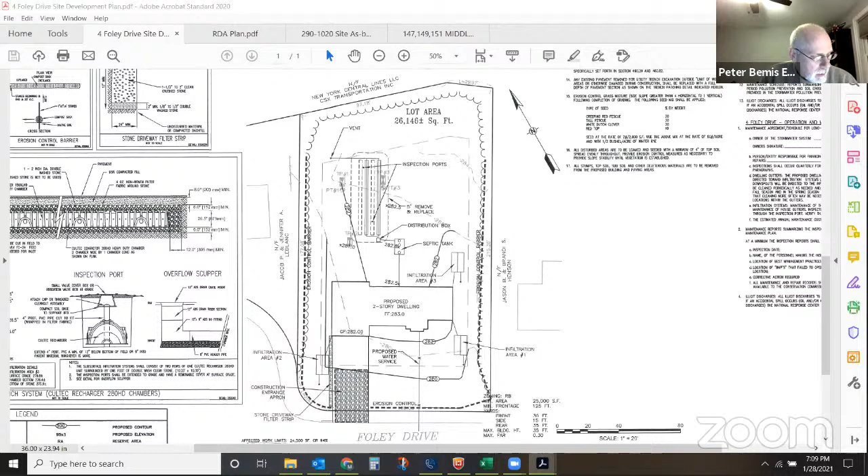Okay, thank you. Any questions from the commission members? Just a quick question - septic approval, is that done? Yes, Board of Health has approved this lot.

DEP number? There's no wetlands on this lot, so there's no notice of intent filing. We would just post an SMP sign with the street number on it, so that if someone had a complaint, they would be able to lodge it with your commission and know the address. This is an application of the town bylaw, the stormwater management bylaw, not the Wetlands Protection Act.

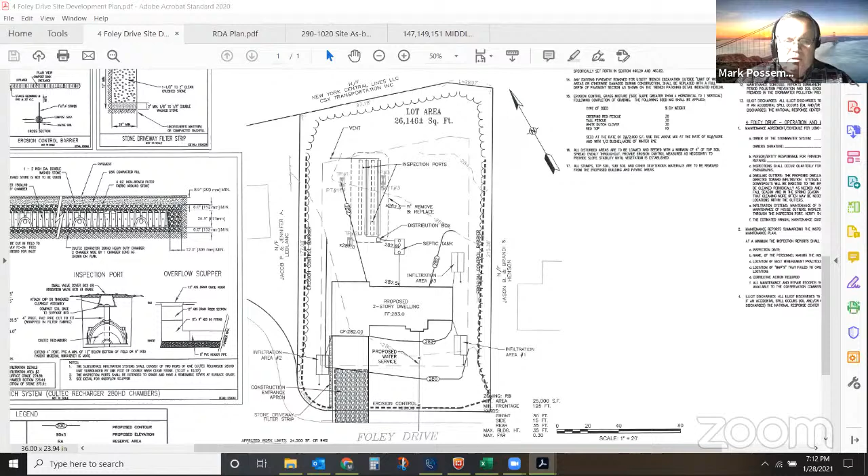Okay. So if there's nobody that has their hand raised, then I think, do I hear a motion to close this hearing?

So moved. Is there a second? Second. All in favor by roll call vote? Watson, yes. Smith, yes. Pete, aye. Geyer, yes. I'll skip Russ. Wittes, yes. Possemato, yes, only because he just joined in. Okay.

We can come back to that, I have the decision drafted. We can do that at the end, Mark, if you'd like. I was going to ask you if you had that drafted yet. You do? Okay, yep. So we can come back to that at the end when we do the other issuances.

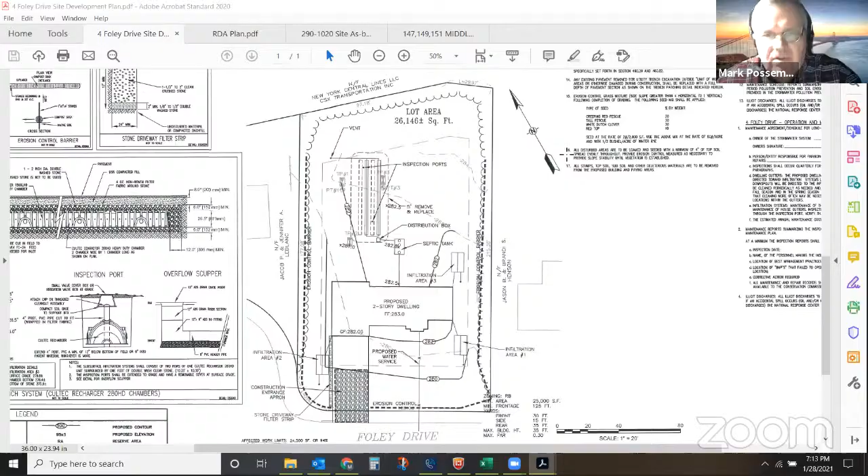Okay, 7:10, 50 Deerfoot Road, RDA, request for determination of applicability for a replacement of a failed septic. So in accordance with the Wetlands Protection Act, Mass General Laws, Chapter 131, Section 40, and the Southborough Wetlands Bylaw, the Southborough Conservation Commission will conduct a public hearing on Thursday, January 28, 2021 at 7:10 p.m.

By a virtual Zoom meeting, the commission will consider a request for determination for a project at 50 Deerfoot Road, map 43, lot 55, for the applicant James Ballard. The project description is replacement of a failed septic system within the buffer zone.

Okay, who do we have here? Joe Marquedant here, joined by Jim Ballard, the homeowner. We prepared the plan that was submitted to the commission. Jim owns number 50 Deerfoot Road, home built circa 1970, '71, septic system about the same time.

He's in the process of selling his home. The system was found to be in failure during the Title V inspection. Jim contacted us about developing a game plan to come up with a replacement septic system. The plan that you have on the screen now is our design.

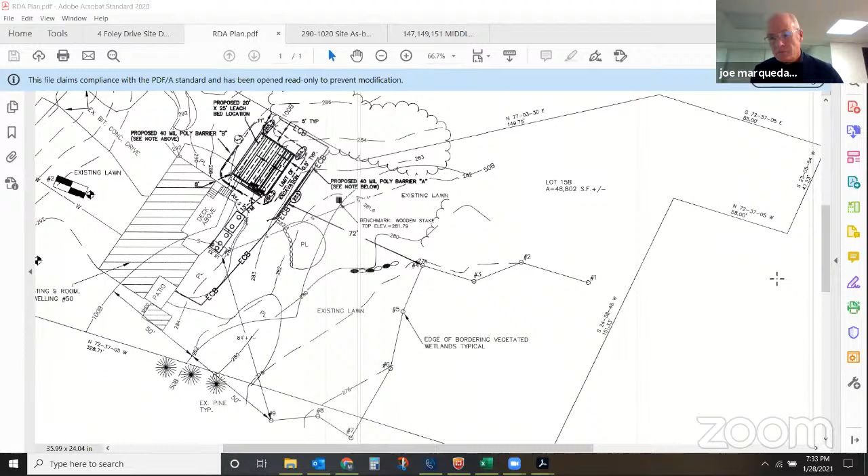Mark. Mr. Marquedant, do you think you could squeeze 5 feet out of the system, moving it towards the northwest? Yes, I believe we could. That would give me some comfort from what Matt has described as the worst case scenario with the line following the 280 contour. That would put us comfortably 50 feet away from the wetland.

I feel like we could condition this appropriately to be able to issue a negative determination, from my perspective. Agree with Ben on that, if you could push it that far. Although I would condition that we not approve the wetland line in our decision. Would we or could we ask that subsequently the wetland line be confirmed, not necessarily as part of this, but as a condition, so a future homeowner would be using the correct wetland line? We would have to come back and do that if they chose to do a project. Right, wetland line then.

Honestly, given the winter conditions we're up against now, we may have lost the opportunity to do that for a couple of months. That land's going to be concrete in the next couple days and be really hard, even if Scott and I went out there, to really look at that soil properly without a machine. Typically at this time of year with snow cover and frozen ground, we become handcuffed to be able to accurately do that. And it's not fair to the homeowner or future homeowners to not accurately depict it if that's what we're going to go after.

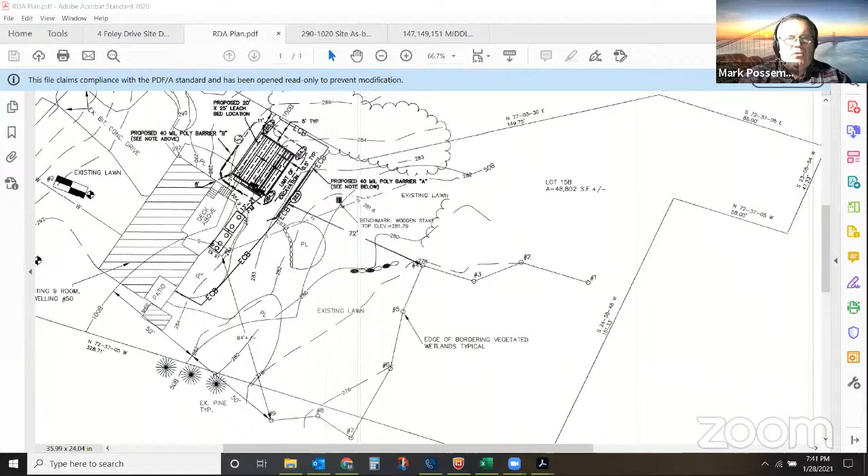All right, do you hear a motion for a negative determination that includes those conditions? Mark, can you just ask for public comment real quick before we do a motion?

If anyone has public comment, put their hand up. I don't see anything right now. I can only see people in this room, so I have no idea. Can you click on attendees, does it switch to the next list? No, I only see us. It should say panelists at the top, say 12, and attendees to the right. I see 23 participants, I click on it and get 12. I only get us, that's interesting.

So I tend to forget there's more than us, because if we're in the town hall, quite often there's just us. Who else is there? There's 11 more. All right, there's no hands up. Okay, no hands.

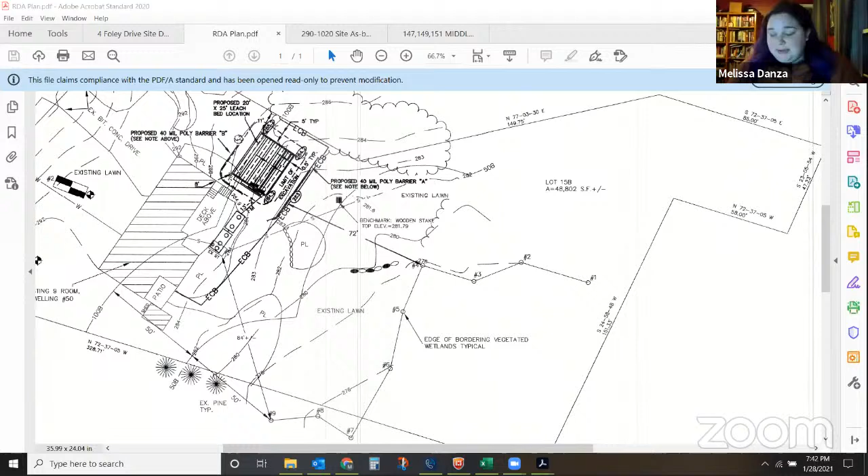So I re-put the motion that I had back on the floor. So moved. Second. Okay, all in favor? Watson, yes. Smith, yes. Pete, yes. Guyer, yes. Gregory, yes. Wittes, yes. Possemato, yes.

So Jim, I will get this to you tomorrow morning because we can do electronic signatures. I'll send it to you and your attorney as well. That's wonderful. Thank you, Melissa, and thank you all very much.

And thanks to Joe, good luck with your move. Are you staying in town or heading out of town?

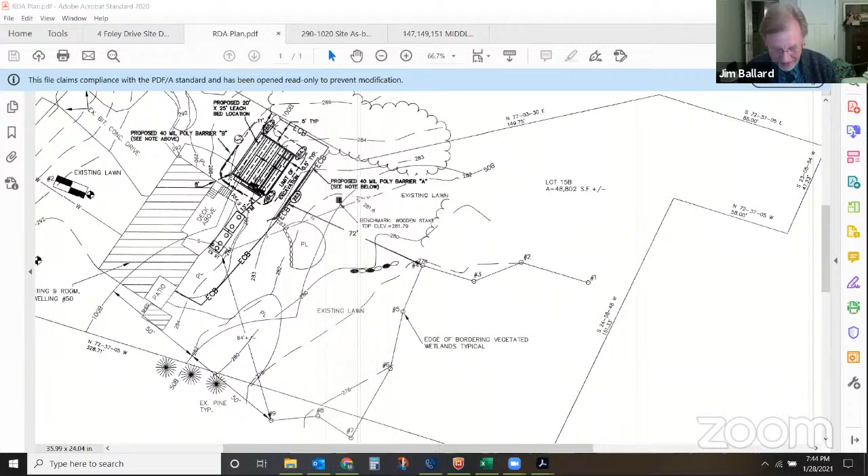My new wife, I got married on December 18th. She lives in Rhode Island, South County as it's called. Her brother and sister live here too, and it's an area very dear to her. I've loved living in Massachusetts since I came out east to go to college from the Midwest, but I love my new wife, and I'm moving to Rhode Island to a nice place in East Greenwich. We'll be coming back. I want to see what happens with the house at the end of Deerfoot that's being restored. I'm hoping it turns into something featuring a nice restaurant we can come enjoy, and drive by my old home and have happy memories.

Well, good luck to you. Thank you, congratulations, good luck. Okay, very grateful, thank you all.

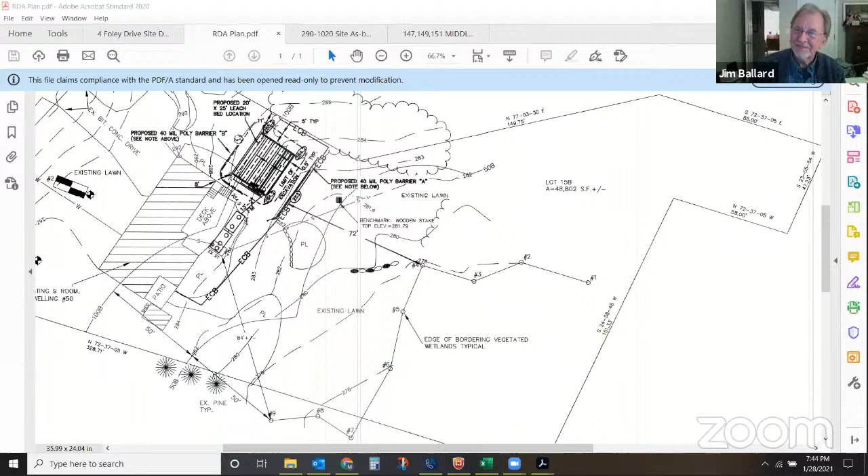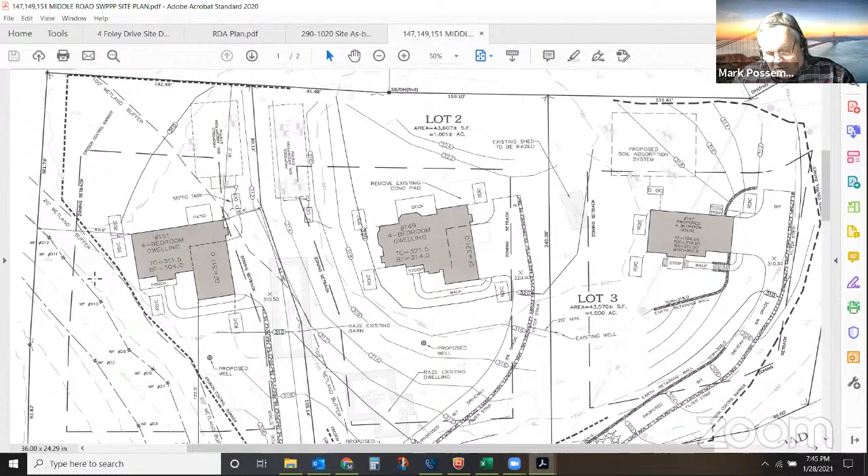Okay, next up, this is stormwater management permit 147, 149, 151 Middle Road, map 28, lots 35, 7, and 10. In accordance with the provisions of the Southborough Stormwater Erosion Control Bylaws, Southborough Zoning Code, Chapter 174, Section 13.5, the Southborough Conservation Commission will hold 3 continued public hearings on Thursday, January 28th, 2021 at 7:20pm via virtual Zoom meeting on the petition of Quality Framing Contractor, Inc. for approval of a stormwater management permit for construction of single-family homes at 147, 149, and 151 Middle Road, map 28, lot 35, 7, and 10. These hearings are being held concurrently.

Good evening, Peter Bemis, Engineering Design Consultants, here on behalf of Quality Framing Contractor, Inc. This project has been before the commission since its initial discussion in December after our filing in November. We have 3 lots, formed from 2 older farmhouses on Middle Road and adjacent land. This land was combined, 4 acres, creating 4 lots, keeping the existing homestead at 145 Middle Road, and creating the 3 lots described: 147, 149, and 151.

151 had been the subject of a notice of intent, I believe back in September, October. We had an order of conditions received and recorded, and anticipated the lots would be developed not exceeding the 50% threshold in the bylaw. Subsequent to that, work started. We found they had cut more trees and started stumping past the 50% threshold, and therefore application was made in November for the stormwater permit, and we've now heard this on one occasion.

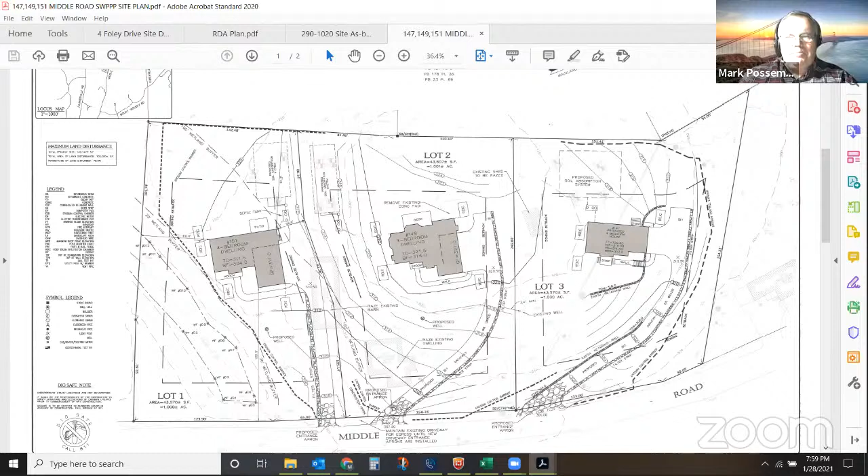Okay, if there's no other comments from the commission, I'll open it up to the public. Right, there are two hands. The first one I will allow to talk is Najee, I apologize if I said that wrong.

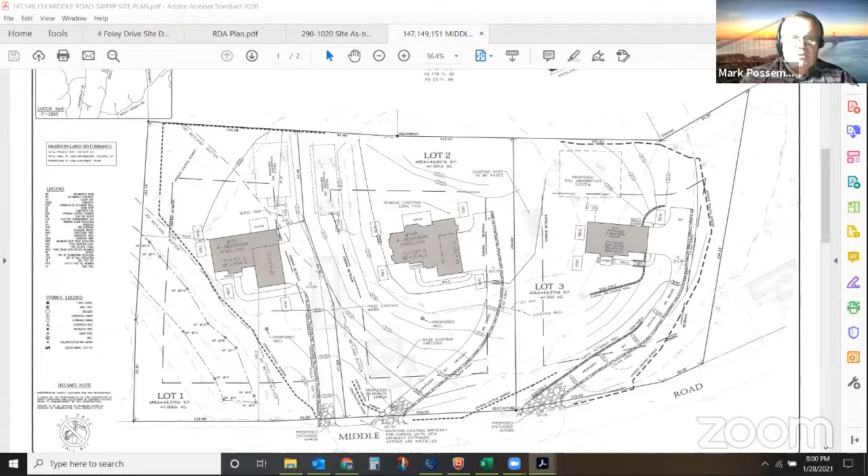You should be able to unmute yourself, and please announce who you are and where you live. Thank you, this is Nagi Elabasi. Can hardly hear you, I'll raise my voice. Hi, this is Nagi Elabasi, can you hear me better now? No. Okay, how about now? Slightly, so I'll give it a shot.

I'm at the house across from lot 1. Jason, who is at lot 1, is also on the call, and he has his hand raised. So since you called on me first, I'll start, but Jason will add as well.

Zach, thank you first of all for trying to fix this, we appreciate that, to keep our neighborhood nice and the way it is now. I'm at 6 Leeds Way, by the way. So what happened is, I think Zach tried to reach out to us a few days after the last meeting. We couldn't meet, and then he came only again last week. He had a plan, he met with Jason and talked to me as well, and we haven't heard from him since. That was maybe a week ago, I'm not sure on the date.

And the idea was that the south side did not have trees, it was only with lots 2 and 3, not with the south side on Jason's end. But Zach mentioned that he's not against it, but it's not his decision. There was no committal from him. He said he's going to get back to us because he checks with the builder or whoever is going to own lot 1 at your end. And that was the last we heard of it, and that's why we're here. We wanted to make sure our voices be heard.

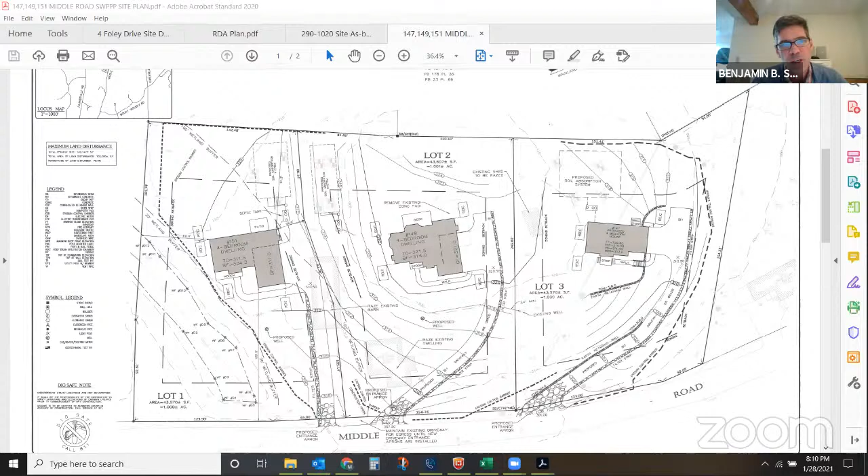Yes, could I ask a quick question? I'm just curious, Peter, in the event that Mr. Lin chooses not to participate, what would we be looking at for plantings along the west edge of lot 1? There would be some evergreen plantings put there, but if we're not doing it along the lot line, we won't get the buffer effect of a double row of plantings, so you basically always have a plant repeating.

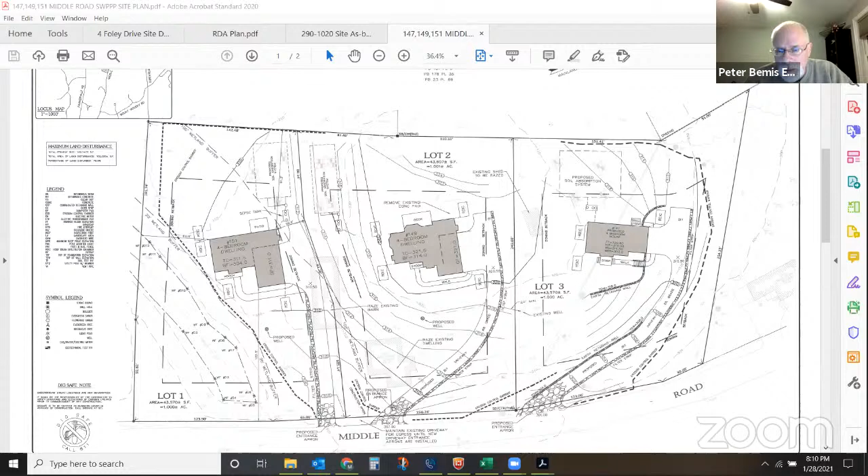No, I understand the double row you're speaking of. I just wanted to ask, in the event that Mr. Lin doesn't choose to participate, you had mentioned some other plantings that would take place. I'd like to have a firm handle on that. You said you have a willingness to memorialize it, which would be fantastic, but we can't memorialize something we don't know what it's going to be.

Okay, Zach, yeah, and Melissa, thank you for putting the exhibit up. So that's the exhibit. Peter, you were talking about continuing down this side of the property line a bit for the screening. We can introduce a few more coming back that way, and Mr. Lin wouldn't be responsible for those because they're not on his lot.

I'm fine with that. So the effect is for every one placed on the middle road lots, a staggered zigzag happens on the abutters' lots, correct. That's what we think would be the most effective way to do this. My only question is, if Mr. Lin chooses not to participate, are those spruces still going to end up on lots within your ability to commit to?

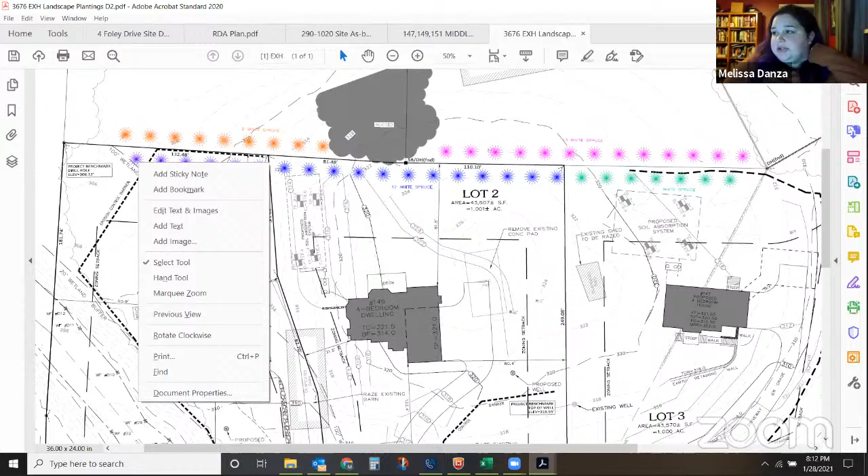I see something in the chat, and it's from Jason—did Lin raise his hand again if you want me to allow him to talk? Yeah, rather than reading his chat, he can probably reiterate what he put in the chat. Jason, you're all set. Yeah, this is Jason again, seven Leeds Way.

So what I was asked to participate in, the plantings were not on my property. I don't know why I would participate in planting trees not on my property when someone could move in and cut them down. I just want to make that clear—I didn't say I wouldn't participate. I'm happy to plant trees on my side of the lot, but if you look at the tree line and where it makes sense for this double row to continue, it's not on my property. If they're saying they'll plant a single row on their side, I'm okay with that. But the reason I wasn't going to participate was because I'm not going to plant trees on the 151 lot property on Middle Road.

Okay, I'm fine with that. Like I said, if it doesn't work, it doesn't work—the illustration is shown with the intent, that's all. So every tree you see on the east side of that line will be planted. And again, we already have an agreement with the abutters.

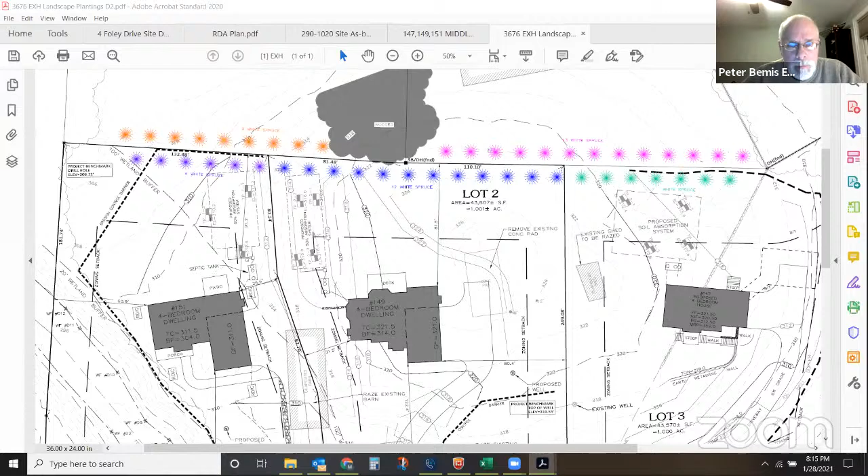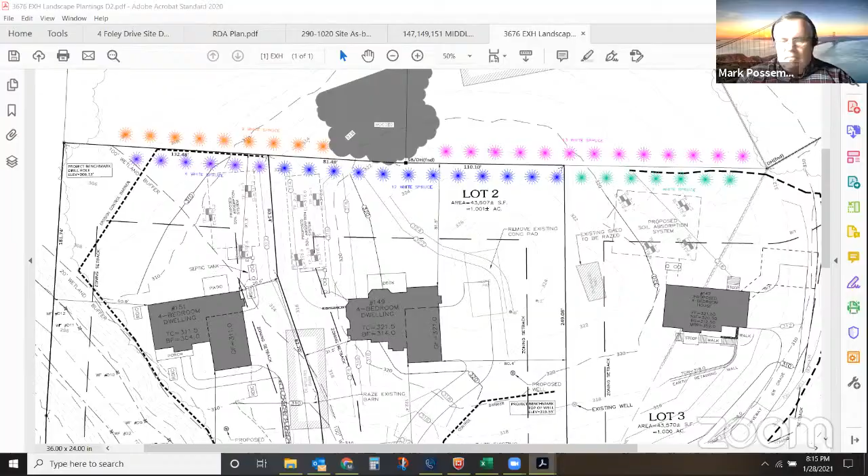Okay, so let's go to that part of the discussion. My understanding is that the number of days in violation was 6, Melissa? Correct. And there are the violations on 151, which are for violations of the Wetlands Protection Act or the permit that we provided in the form of an order of conditions. And then there's the stormwater management, cutting and then stumping beyond the 50% of the lot size.

So, any discussion on this by conservation members? Yeah, this is Ben. I think tonight we can only discuss the stormwater management permit, correct? That's the hearing that we've opened.

Melissa? Reading through the bylaw, we do have to have an enforcement hearing for fines underneath the local bylaw. We do not have to have a hearing necessarily for fines underneath the SMP. Oh, okay, so it's a little weird, but I guess our practice through the years has been the fines have been used as a tool solely for the purposes of getting somebody into compliance with the regulations. That's simply what we've done since I've been a member of the commission.

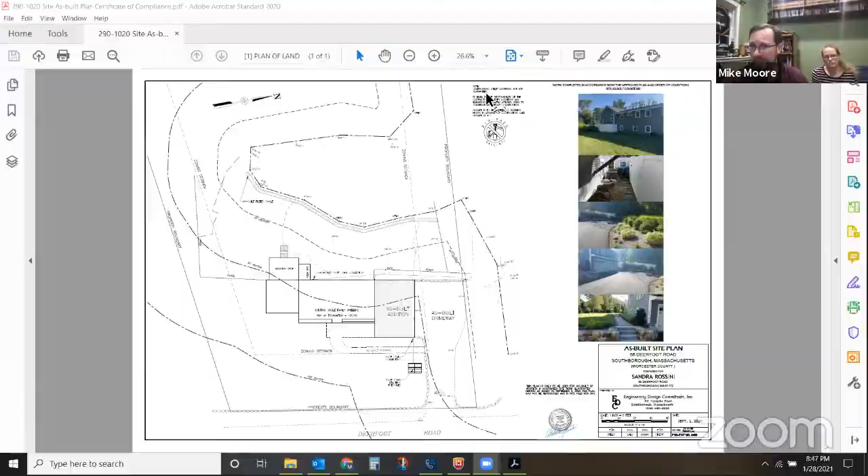So we would definitely need permission to do that, to put it on the grass. So if we were okay doing that for this year, that would make us perfectly happy. And then next year, after the snow's up, we could come back, do that survey of the far yard, and get that determination.

Thoughts from other commission members? Not opposed to that, sounds reasonable to me. It sounds like a great solution. I'd also say that it sounds like a case for an RDA come spring or summertime, to make it not so burdensome. I think an RDA might be an appropriate filing, which is a less intensive filing and a less expensive filing fee.

Thank you, I'll look into that. Yeah, it basically is, hey, we want to do something and we need to know whether or not we have wetlands out here or not, kind of thing. And if you do, whether or not what you're proposing is going to be very impactful or not. If we view that it's not, then you move on and go ahead and do it. But it kind of works that way.

Sounds perfect. So it sounds like the commission is generally in favor of what you proposed. But I would go ahead and propose lifting the enforcement order at this point, since he's taken the rink down out of the wetland and is going to put it someplace else on his property. I don't think that burden should remain any longer. So I'd look for a motion to remove or lift the enforcement order, based on the actions the homeowner has taken and the proposal he's made.

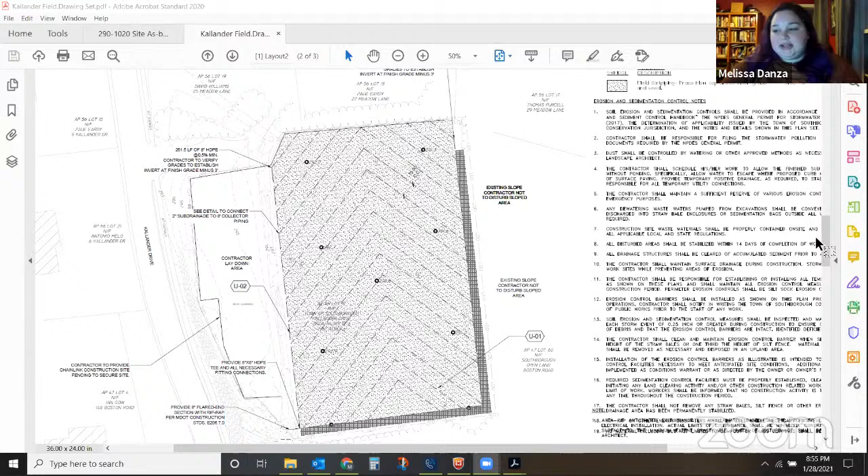Discussion on invasive mitigation at 6 Newton Street. This should be Mr. John Walter. Yes, so I'm going to move him up.

I sent you all a brief overview and uploaded some documents to the Dropbox. What has come to our attention, through Russ nicely enough, is that on this property there's a lot of invasives that have taken over part of what used to be the lawn, the 20-foot buffer zone, and a little bit of the wetland. The homeowner has agreed that it would be nice to have this area restored and the invasives removed. So this is kind of an initial discussion to see what the commission might be open to in terms of allowing work within that 20-foot buffer, and to what extent.

If there's something different, maybe Russ or John could jump in, and I'll pull up some of the plans, the approved plan we have in the meantime.

If you wouldn't mind if I start this off, I'd like us to look at this as more than just this project. We should be able to use this to our advantage, selfishly for the commission, to get a bonus rather than having a homeowner pay an awful lot for engineering and other permitting, when especially under our bylaw we have an opportunity to get things cleaned up really nicely in town.

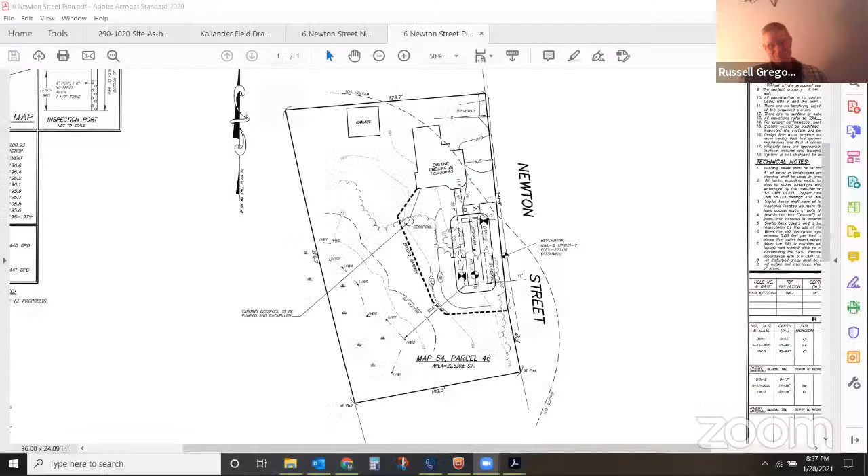So moving along. This was the approved plan, originally just for septic. And like Russ said, this is strictly under the local bylaw, not under the WPA. The wetland line you can see is kind of back here, mostly influenced by the railroad tracks.

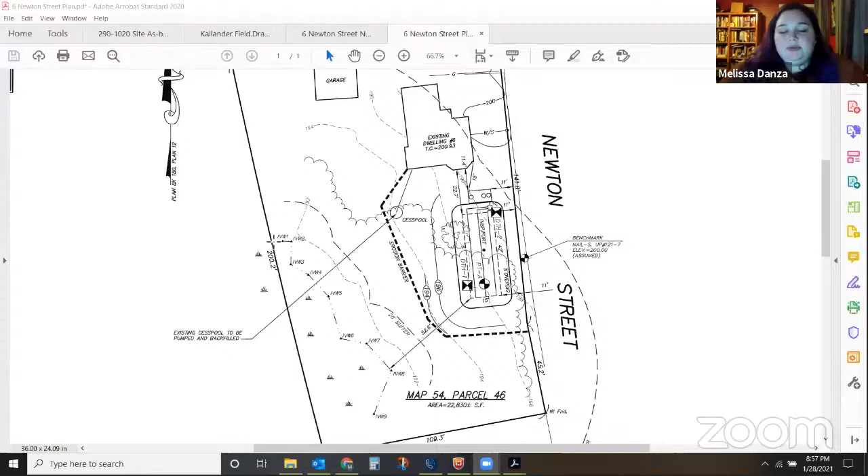Some of the other pictures I uploaded to the Dropbox included some that Matt took during the original site inspection. You can really see the overgrowth this area has taken, along with some recent photos showing the dormant winter phase, and John nicely provided some historical photos of what it used to look like as well.

Melissa, do we know what they intend to replace it with? Are they going to turn it into lawn or something like that? Are they going to plant native species? I guess I'll let John answer that one.

Well, my intent is really just to clean the lot up, as you can see from the invasives there, mostly Japanese knotweed. My hope is that with the contractor I have on site, I'd be able to do some surface prep to ultimately install lawn within a reasonable distance of the wetlands. So I'm really just trying to, I don't want to say restore, but address a lack of maintenance and just beautify the property a little bit.

I'm not looking to go crazy. I've been a landscaper in town for 20 years, I know more or less my limitations, and I'm just trying to clean the lot up. I don't believe I'd be removing anything that would warrant an offset of plantings, unless I have to put the Japanese knotweed somewhere else — I'll put that over on the Boy Scout project on the other side of town, they can keep that. But for right now I just really want to clean it up.

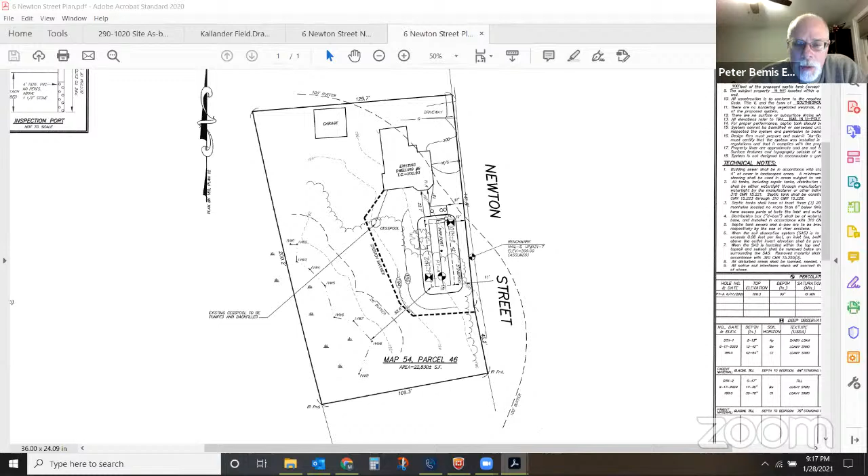So we could come up with a concept and put something together, and the commission meets in 3 weeks. Not much is going to get done with the weather the way it is anyway, so I'm game to meet you out there and put in some effort on my part to help. I appreciate the offer, thank you.

All right, so John, I think what you're hearing from the commission is they'd like a little bit more direction and clarification from you as to what extent you want to go out there and do what you want to do. Maybe a little more thought with your wherewithal and what your vision is.

Okay, well some feedback would be nice, as far as if I were to remove the knotweed, suitable planting to replace that, maybe, and we would need to establish a line of how far you would allow me to maintain, either regularly or semi-regularly. Does that no-touch area ultimately allow that to be lawn because you find that to be an equal balance? Like I said, blueberry bushes is just an example, it doesn't have to be that.

I'm new to this, very much so, and I've been thrust into the middle of this - this is all very new to me since we've taken in this house, and I'm trying to navigate through some of this properly, and very much open to suggestion, I suppose.

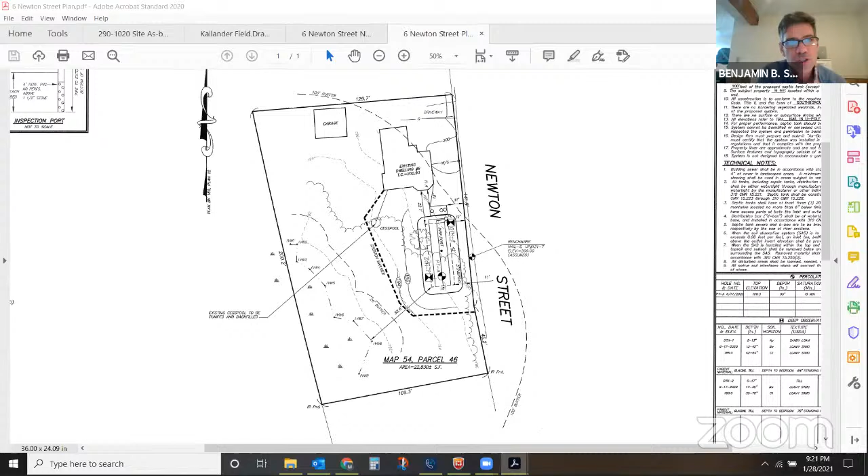Yeah, agreed. Melissa, do you have some lists of native plants to share with John? I know stewardship does. Yeah, I can definitely send some good resources to find the appropriate plants for the soil conditions. So John, I can definitely send you that. Fantastic, thank you.

So John, maybe in that vein, you could sketch something up as an overlay to what we're looking at here - where you'd like to reclaim lawn, and where you might want to add those plantings. Does that seem reasonable? Yeah, absolutely.

One of the questions in my head would be, what kind of encroachment am I allowed on the bordering wetlands or the wetland flags? Do I need to leave a certain percentage of it? Do you want me to leave clearly a 5 or 10 foot strip up to that? I need to kind of understand where I could be working with this.

I mean, if we didn't have a bylaw in town, there wouldn't be a 20-foot buffer at all, which means you would be allowed to work right up into the wetland flag edge. Now that said, we're talking about leaving some buffer someplace with some plantings and giving you back some of the 20-foot buffer for lawn as a trade-off.

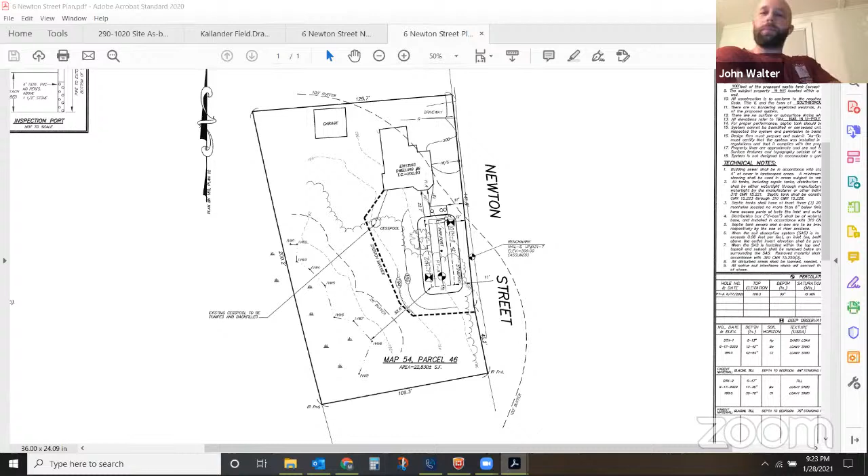So, any other questions? I have none. Anybody else have anything else? I see head nods left to right, so that's a no. That's great. So do you think you have enough to go on at this point?

I do believe so, yes. With a list from Melissa, I can fashion some thoughts on paper. Do you want that to be engineer drawings, or do you want my chicken scratch scribble? What do you feel would be appropriate here? I think from my perspective, if you could create some sort of an overlay for that sketch we just saw. Okay, I can use my existing plot plan to show thoughts. Absolutely, I can do that. Or if Mr. Bemis offered something, I'm not sure how extensive that would be if he wants to get out his T-square and pencils. I don't mind doing a to-scale drawing, so this is done properly.

Awesome. So you can count on that, Mr. Walter. I'm in your camp. Good to know. We got to get along as neighbors. You get it. Okay. All right, we're going to move on. Thank you for your time, everybody. Have a wonderful night. Thank you. Have a good night. Thank you.

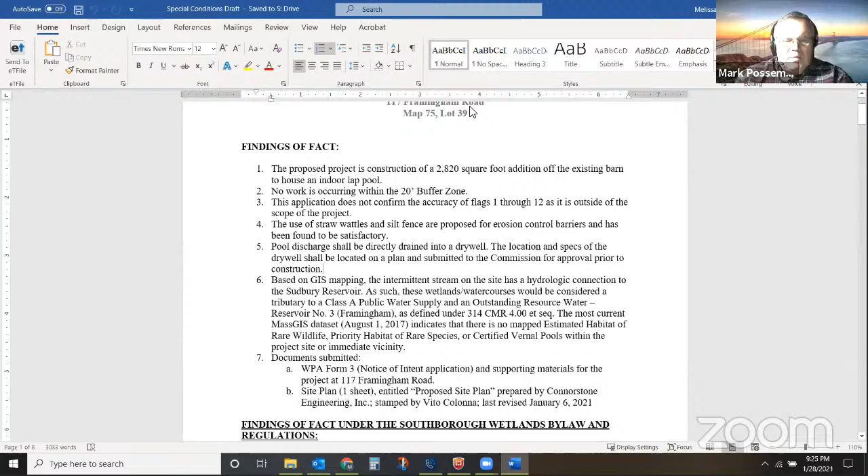Okay, do I hear a motion to accept these conditions and issue the OOC as written? So moved. For a second? Second. All in favor? Watson, yes. Smith, yes. Pete, yes. Geyer, yes. Gregory, yes. Wittes, yes. Possemato, yes. Okay, I will get that issued then.

All right, request for certificate of compliance for 139 Deerfoot Road. That's going to be discussed at a later meeting. Yep, I think they're probably going to come back more towards the spring. I believe they're making an agreement between the homeowner on a different type of stormwater depression, I think they're going more towards a rain garden. So we'll see that more towards the spring when they finalize it.

Yeah, I took a drive by there. That little place is ugly. It's just plain ugly. Yeah, I will admit it is.

Okay, next up is the snow dump complaint, 22 to 24 Turnpike Road. Yes, so have you talked to anyone for updates? I talked to Kimberly Roth, who is our circuit rider for the central region of Mass DEP Wetlands Section. And we talked about the snow disposal guidance in terms of the ORW in which this property is located.